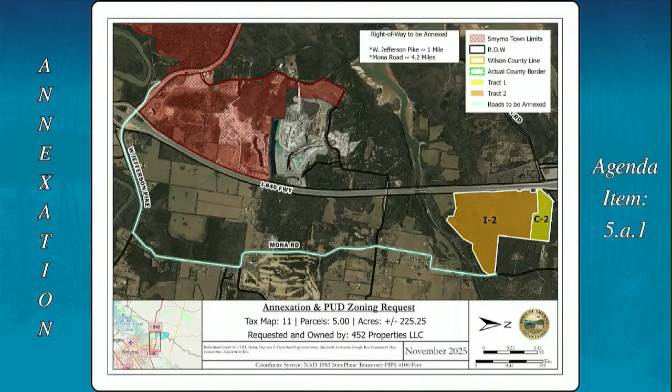Now we're going to get into a couple other comments we had regarding the revised plan. There is a phasing plan within the packet of information you have in front of you. That phasing plan is part of — I'll see if I can pull it up here.

The roadway — this is kind of looking at it west to north, with north on the left-hand side instead of at the top of the page. The roadway that's proposed: there's an existing county road, a remnant of what used to be Mona Road, called Coulter Court. That would be extended through the site.

The phasing plan has the 4 southernmost buildings built in phases 1 and 2, and there would not be a connection back to Bill France Boulevard and Coulter Court until phase 3. We have a concern that, depending on when it got built, as they start building the buildings in phase 3, Mona Road would be the only ingress and egress from those buildings, potentially up through phase 3. So we did have a concern about that from the phasing perspective.

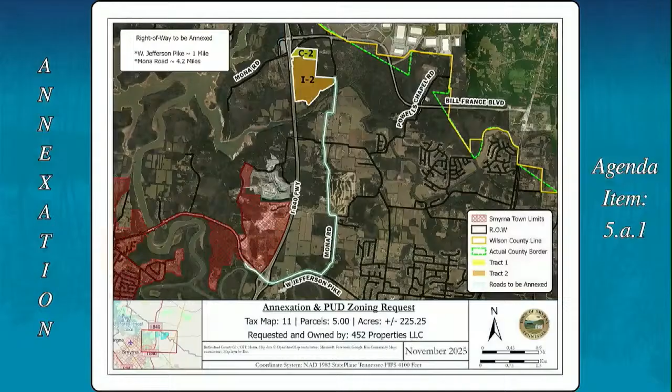So I'm gotta ask - this new road on Mona Road with that big of traffic, is it going to require a stoplight?

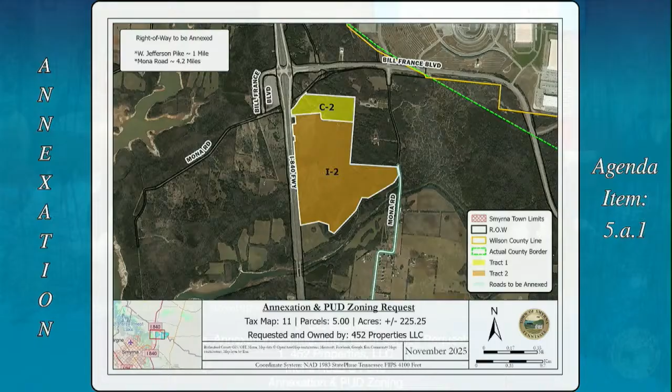Ultimately, at some point, maybe outside of the full build-out of this, when more development continues to the east, yes, at some point there will be a traffic signal at Mona Road, most definitely.

The racetrack, which is across from it, has a lot of industrial development, so it fits the zone. I'm glad they're doing commercial, but there's eventually going to be probably a need for a signal, I would think.

My current thought is just all the homeowners that are south of this - if Paul's met with all of them, and they're all on board and understand what's coming.

Yes, sir. Kevin, would you point out where the potential fire hall would be? Yeah, it's right here. That could have its own driveway in and out onto Mona. Yeah, it would.

So let me, since you got the laser, you can follow me, but I'm kind of looking at your phasing map, and I've kind of heard what you said. Yes, sir, and I appreciate all that, but I'm going to respectfully disagree a little bit.

So Coulter's going to come down off of Bill France, and that first 350,000 square feet of commercial in the front there is Phase 1. Then you immediately pass Building 1 and Building 3, which is part of Phase 3. Then you hit that intersection and go out to Mona Road, which crosses in front of Building 8, which is Phase 1 again.

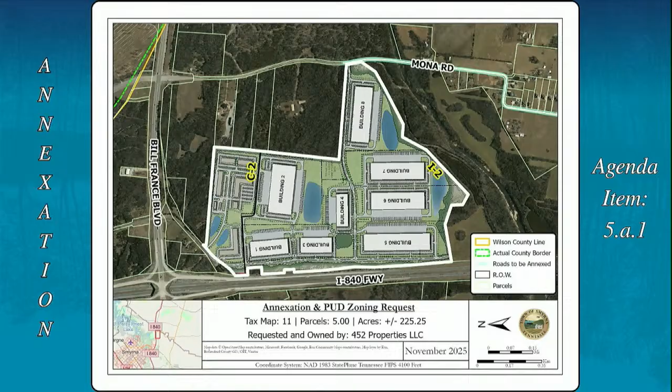So part of the clarification on that - Hillwood has no intention of developing the commercial tract, so they don't control that. If somebody comes in, once they start bringing utilities here and they start marketing this property, and those folks - someone comes in and says, yeah, I want to jump on board Phase 1 when y'all are doing your Phase 1 of the industrial - we just had to put a phase on the commercial because it was asked for.

So with our conditions that we stated in there, if a commercial developer comes in on Phase 1, they have to make that connection to Coulter Court and extend it into the development. So if the commercial starts to develop, that may change, honestly, not to mess up our deal.

The phasing plan is our best guess right now, right? We're locking in the site plan - that's part of the condition too that we came back with.

Originally this was a conceptual layout that had some flexibility, but obviously just talking with the residents and the city council, that was part of the condition. So now we're locking this plan in - any changes that we do to it, we have to come back with an amendment. So that's part of what we've agreed to.

But market conditions could say that buildings 1 and 3 - somebody says I want those instead of building 8 - Hillwood may make that decision, like okay, well if we do that, then those improvements may start happening quicker than what we're forecasting right now. They obviously start with a lot of speculative development.

I understand that, yeah, but it could also be later. Yes sir, that's my concern, right. And here's my problem.

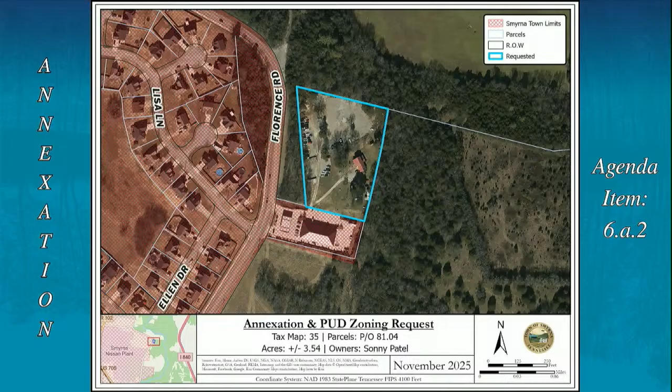How is that accessed, or where would it be accessed from? It would be accessed to the south. There's a development south of here, and that's how it would be accessed. So the access to this would be through it's all the same parcel. It would be accessed through the parking lot of the gas station using the same access points that they have here, and then access to the north.

You said it's all the same parcel, so there wouldn't have to be any kind of easement? Correct. It's all owned by the same people, yeah.

Where specifically is the auto turn concern? Is it more in the storage? It's within, let me see if I can get to that sheet. I know there were some locations where it was crossing, kind of going over some curbs and getting really close to some of the buildings. I don't know exactly which one of those it was, but...

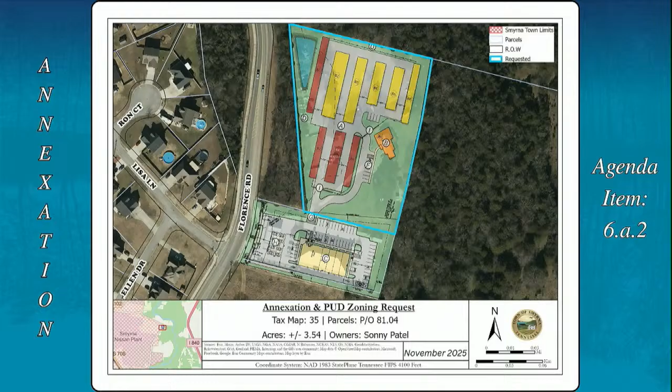So that's what I'm worried about, the property to the southwest, the Hollingshead property. I think it's all RM currently. It seems logical that someday it would develop as residential, right here for sure. And then the Corps property is all between it and Florence, and behind it too, right? That's all Corps, yes.

So we wouldn't need to require a buffer there because it's not technically zoned commercial or residential? I don't know if it has a zoning assigned by the county or not. It's actually not within the town.

Is there any precedence for that land ever developing? It would be up to the Corps of Engineers to sell it. Do they ever? Good luck with that. Have they ever done that? I don't know that we've ever seen that, no. In the 50-plus years it's been in place, a lot of people would like to buy some lakeside property, but they won't ever do it here. Okay.

What is the height of the building? 20 feet, I think, is the maximum, as shown. That would be the maximum height.

So the ones fronting Florence, are they one story or two? It's all single story, yes. I'd say 20 feet's probably the max, some of those canopies would probably be the tallest if they want to get something high enough to park a large motorhome underneath. I've got a fifth wheel parked under one and it's 16 feet. So still less than 20, but it would be right up there.

Well, you're not gonna have too many long vehicles if you've only got a 24-foot wide driveway trying to back or drive into these stalls. That's a little tight. And not to mention, if the fire trucks can't even turn around there, I think this whole thing would need to be adjusted to fit. I think that's our thinking as well. I think the layout of the buildings is gonna have to be adjusted some, maybe a building gets eliminated or a trailer or camper spot gets moved, something like that, potentially.

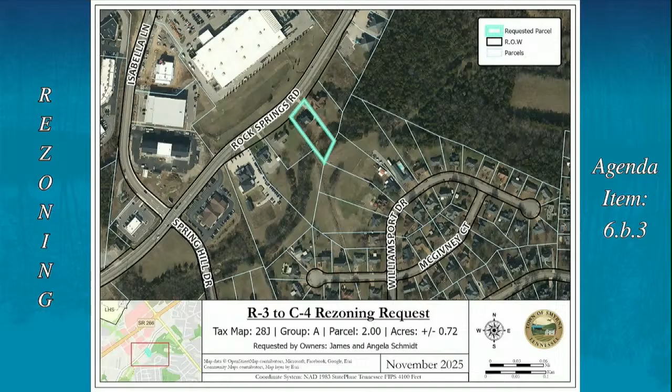Just for information, the rear about 70 feet or so of this property on the eastern boundary, going to about 120 feet on the western boundary, does lie within the floodway, and about 15 feet beyond the floodway lies within the 100-year floodplain. This still leaves about 150 feet in depth on the western boundary and 180 feet on the eastern boundary outside of the flood hazard area. So there's still plenty of room for the existing home, as well as any future commercial building that could be built there. There's adequate area to develop this property commercial, but I wanted to bring that to everyone's attention.

Most of the parcels south of Rock Springs Road through that area have been rezoned, primarily C4. At the intersection with Old Nashville Highway, there's one or maybe two that have a C2 zoning. So this would be consistent with that as well.

Yeah, at the corner of Spring Hill, I believe that's more medical office. That's a medical office building. And next to that, there's a hair salon and some other things as well, I think. And then as you move up, there's an insurance agent's office and a couple other things, and across the street, this is facing the back of Home Depot. Home Depot, correct.

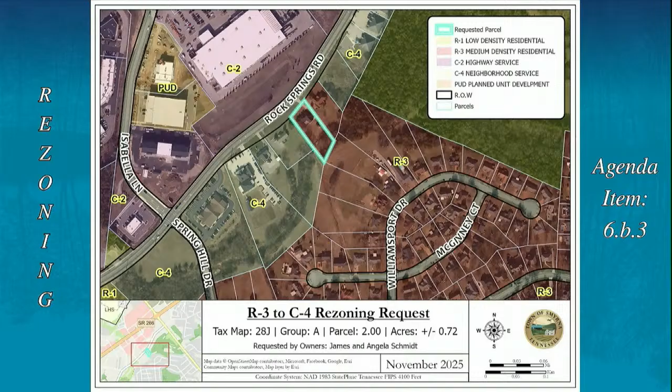Chairman, before you call for any discussion, I'm going to stay out of this. These are good friends of mine. They've asked me to potentially help them do something with that property at a later time, so I just feel like I need to abstain. Okay, so mark him as not participating or voting.

I think these are the last two residential lots along that whole stretch right there. It is. And I've been contacted by representatives from the property to the east, and we're probably going to see that one pretty soon.

Any other questions for Kevin or staff concerning this rezoning request? If not, I'll entertain a motion. I'll make a motion to approve R3 to C4 with staff comments. I have a motion to approve with staff comments, do I have a second? Second. Motion and a second. Any further discussion? All those in favor of approving this motion, please signify by saying aye. Aye. Opposed? This motion is approved.

Okay, we're now on to preliminary plats, beginning with Gambill Oaks subdivision, Gambill Lane at Elway Court, owner/developer Odessa Luis Settles, and Hensley Civil LLC.

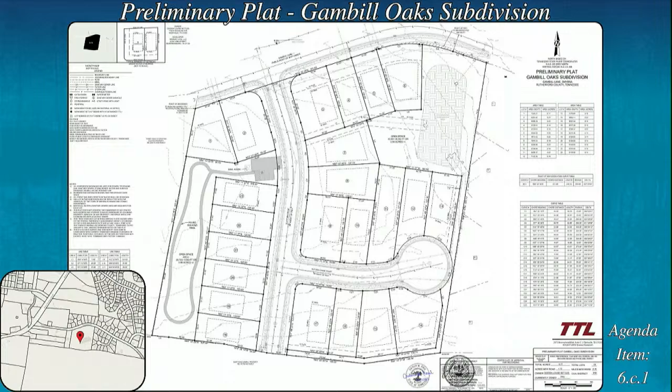Okay, questions for staff concerning this? Is this consistent with our prior approvals? Yes. Other questions?

Do I have a motion? Motion to approve with staff comments from Charles. Do I have a second? Second. Motion and a second. Further discussion? All those in favor of approving this motion, please signify by saying aye. Aye. Opposed? This motion is approved.

We're now on to our second preliminary plat. This is Hidden Hills, Section 7, west termini of Tamlin Avenue, Burgundy Drive, and Bonifay Drive, owner/developer Openland Communities. This is the preliminary plat for Hidden Hills, Section 7. We saw a sketch plat of this a few months ago, so this will be the preliminary plat. It's 59 lots, 23.2 acres, in an R3 zone.

Several standard comments, really 1 through 9, all need to remain. Comments 10 and 11 are related to one another. There are some significant topo changes on this property, resulting in significant roadway cuts and sewer lines proposed to be fairly deep. Those are things we need to work through with the engineer. We want to keep those comments and point them out, as we'll be working with them as they work through the construction plans on this project to make sure they meet all of our requirements.

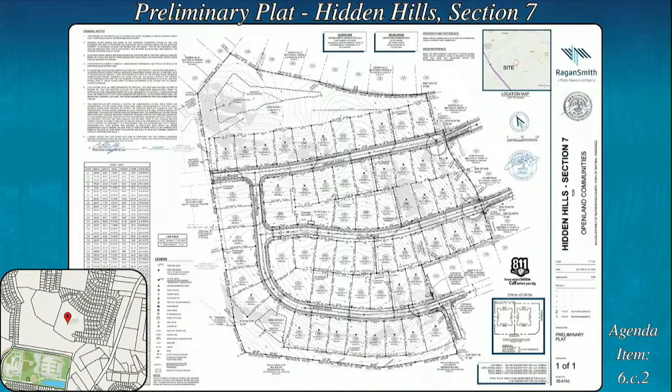Comment number 13 has been addressed. The plat has shown some existing temporary turnarounds, and actually existing right-of-way at the end of Bonifay. It's essentially going away and becoming just a connector road through there. Some of those have been shown as still owned by the previous owner of this property, and that has been cleared up, so comment 13 can be removed.

Comment number 14 is a relatively standard comment regarding the roadway lighting plan. That typically comes in with the construction plan, so we want to be sure we get that as well. So basically, with the removal of comment 13, staff would recommend this to you.

Questions for Kevin on this? Is this consistent with our prior approvals? Yes. Other questions or discussion?

Do I have a motion? Motion to approve with staff comments. I have a motion to approve with staff comments. Do I have a second? Second. Motion and a second. Further discussion? All those in favor of approving this motion, please signify by saying aye. Aye. Opposed? This motion's approved.

We're now on to final plats, first being Briley Downs, Section 1, Phase 1, Rocky Fork, Almaville Road, owner/developer South Coast DFH, Nashville, LLC.

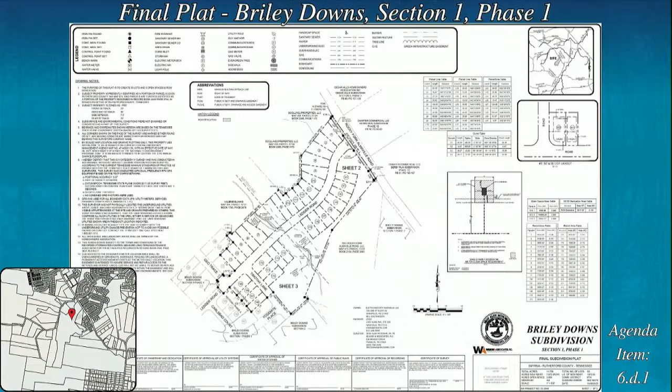Okay, turn to Kevin on this. Do you have any questions? Once again, these were clients of mine some time ago, so for each section of this, 1, 2, and 3, I'm going to abstain from.

Was this previously approved PRD? Yeah, this was a previously approved PRD, and then it did get amended because they incorporated a little bit of the adjoining tract into it. This is consistent with the most recently approved PRD. Under the old PRD requirements? Under the old requirements, that's correct, yes, because it was there, and they were under construction and everything before we ever changed the requirements. They were vested.

Okay, other questions or comments? Move to approve the staff comments. A motion to approve the staff comments from Matt. Do I have a second? Second. Motion and a second. Further discussion? All those in favor of approving this motion, please signify by saying aye. Aye. Opposed? And one abstention.

Next, we have Briley Downs, Section 1, Phase 3, Rocky Fork, Almaville Road, owner/developer South Coast DFH, Nashville, LLC. This phase is 29 lots, 6.48 acres. Again, several standard comments, similar to what the previous one had there, really 1 through 5. Again the same comment regarding the gas line and the drainage easements, and CUD's comment as well. So with those remaining 8 comments, staff would recommend approval.

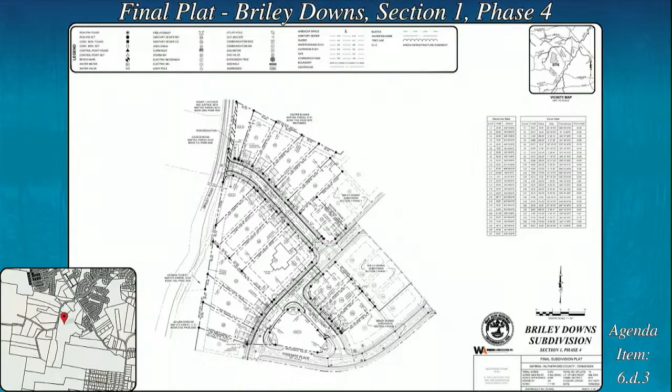We'd ask for a dimension, as this phase does border Briley Road, and so we ask for a dimension for the right-of-way dedication there of at least 25 feet from the center line. And again, the same comment regarding the drainage easements in the plat with CUD, so with those 9 comments, staff would recommend approval. Once again, consistent with the most recently approved PRD, yes, sir, and met all the requirements as far as regulations and ordinances at that time.

Correct. Okay. Do I have a motion? Move to approve with staff comments. Motion to approve with staff comments from Selena. Do I have a second? Motion and a second. Further discussion? All those in favor of approving this motion, please signify by saying aye. Aye. Opposed? This motion is approved.

We're now on to Fox Meadows, Phase 1, Lee Road and Rocky Fork Road, owner, developer, Surrey Homes LLC. This is the Phase 1 final plat. It's 40 lots, 15.05 acres. This is for the Fox Meadows development. The first 5 comments there are all standard comments and would need to remain.

Comment number 6, there were some easements on some of these lots that are kind of oddly shaped or angled. So we just asked for some additional dimensions and labeling on those to be sure, when the home's being built or when a homeowner is looking to build a shed or something, that we have good dimensions on those easements for them. So we can remove the last sentence under that comment. They did correct, I think, lot 37, so we still need 36, 38, 39, 75, and 79 to have dimensions. So just want to keep that comment as amended.

Questions for Kevin concerning this?

Kevin, is there the 2 roads that go out on either side of the mail kiosks? Is there already a development underway on that side? No, there's not. In fact, I think there's actually a future phase maybe of this project as well. Eventually, the property to the west of this property has actually been purchased by the school board for the school. Okay, and this was a previously approved PRD under the old regs? That's correct.

Other questions or comments?

Do I have a motion? Motion to approve the staff comments. Do I have a second? Second. Motion and a second. Further discussion? All those in favor, please signify by saying aye. Aye. Opposed? This motion is approved.

We're now on to site plans, with the first being Bailey Equipment and Intralogistics, Tridon Drive, owner-developer Caravan Ventures, LLC. And Vince, you're up. Yes.

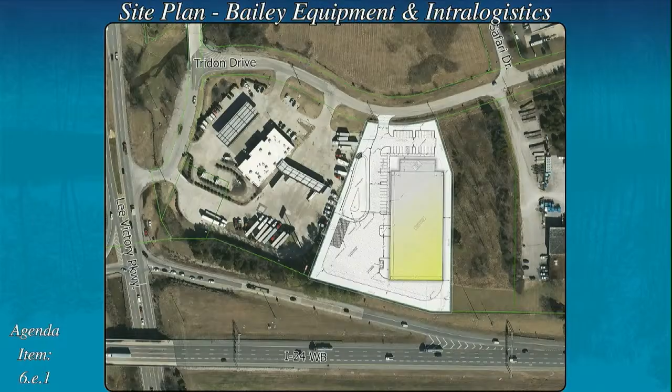Standard comments 1 through 7 all remain, and staff comment 1 regarding the architectural elevations not meeting design review. We do need them to revise those elevations to meet design review. Comment number 2 was a utilities comment asking them to show a 1,500 gallon oil water separator. Comments 3 and 4 are both stormwater comments that will remain, and let stormwater review those at a later date. Comment number 5 is from our fire department.

They did have a requirement that they are to access within 150 feet from all points of the building, as mentioned earlier in one of the other items for the storage units. So really the issue is the south side of the building, which if you're looking at the picture is on the right side. There is no apparatus way to get around that side of the building, and it does exceed the 150 foot from each parking lot area. So fire department does need to reach all points of the building at least 150 foot.

We had another comment within that comment that a fire hydrant is required within 400 feet of all parts of the building. They have done that, so that part of the comment can be removed. And then the last part of it, that a turnaround is required at the back of the building, that is the rear part of the building that is up against I-24. As it's shown, it exceeds 150 foot, which is the length in which the fire department does require a turnaround, whether it be a hammerhead or cul-de-sac. So they do need to show that at the rear of the building. And then, informational part, the last part of that comment, there's a gate to get to the back part of the building. Fire department just requires that to be Knox approved. So that part is more informational, but 4 comments in one more or less. The fire hydrant is the part that can be removed though at this time.

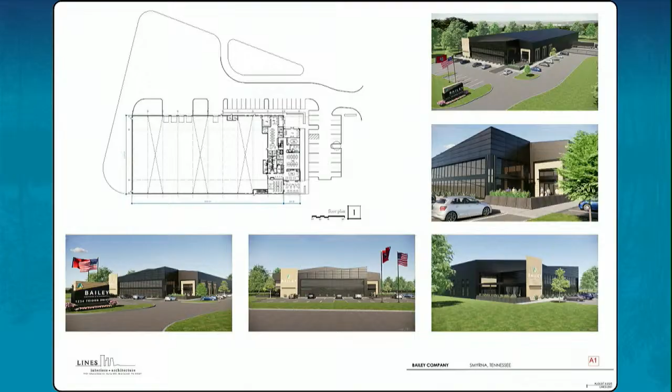There are, of course, cost and functionality concerns. I feel this is an onerous burden of cost that accomplishes nothing for the community, nothing for aesthetics, and nothing for function. I'd rather invest that in making the landscaping even well beyond the requirements I just heard about, bringing in beautiful natural trees and so on, and more importantly, hiring people here in Smyrna. So in short, all comments are addressed except we'll address the landscaping. We're asking that this be approved as is, and I appreciate your support and your service to the community.

Thank you. Okay. Oh, I'm sorry, you weren't speaking. You were just... I'm here to answer questions if you have any. All right, any questions from the commission concerning the applicant here?

In the comments of the metal, I don't think this is what we've seen typically, just basic industrial type metal. These are the new, I assume they're Kynar, as far as the coatings on here? Something like that, yes. The front part of the building would be a more upgraded architectural metal panel, so it is quite a bit nicer than your standard industrial metal siding. So you're seeing this type of metal on a lot more commercial buildings that are going for that more modern, higher end look? But it's still metal. It's still metal, yeah.

Is it metal where the Bailey sign is at? What we had planned for that was, it would probably be a metal, but it looks like wood.

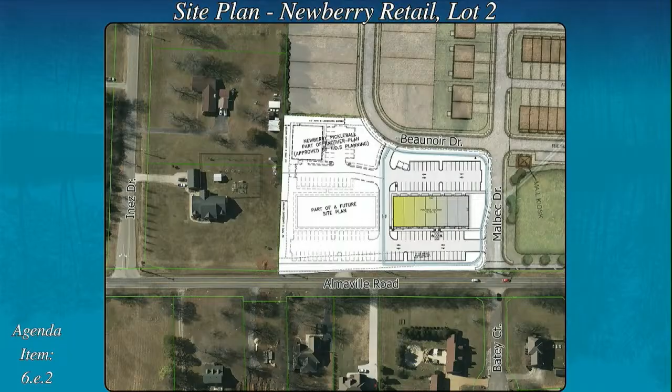Questions for Mitch on this? I just got a question for Jeff.

Based on the amount of certain types of businesses that we can watch go into most of these retail spaces, do we have any control over removing any of those as potential tenants?

Not sure. Vape shops? This particular PCD or PUD had C4 uses, so they couldn't go in this one. Per the PUD, we'll put that in your pipe and smoke it for later, because it's going to continue to come up. As we have it right now, we couldn't remove one.

If we put something in place, I'd have to see what that is. I don't agree with what I've seen some jurisdictions do so far that would hold up to a challenge, but we'll look at that. I know you need more work to do. You sit back there twiddling your thumbs. That's right, I'll ponder on this issue tonight, probably. Send an email forthcoming.

So, obviously, there are 2 roads that provide access to this, part of the LF development. So there's no direct access to Almaville Road from this property, that's right? That's correct.

Could you pronounce that road to the north? I was waiting for somebody to say Beau Noir? Beau Noir, maybe? I would guess Beau Noir. Depends if it's southern or not.

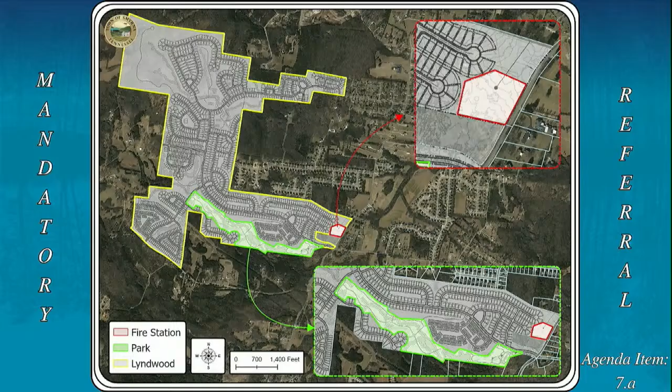The beauty of it is by donating the land, we can do what we need to do with it in the future - don't have to figure that out right now. My concern was just whether it's actually usable land, not just a hillside. They told us Cedarstone wasn't usable too, remember? We had to make it usable with some of it. It wasn't usable either. And in the big picture, this is where we would want a fire station, I presume?

Yeah, this is certainly an area we need to think about. That's something we've been thinking about, trying to find a place, so this works out well for us in that regard. We've been talking about our urban growth boundary goes just a little bit past 840, right? Yes, so we've talked about needing another fire station out there. There was even a conversation from the county about putting more schools out there in the future, so we definitely want one close to the schools - this fits that for sure.

I'm going to need a motion on this. Motion to approve with staff comments. Do I have a second? Second. Motion and a second. Further discussion? All in favor of approving this motion, please signify by saying aye. Aye. Opposed? This motion is approved.

We are now on to the November bond review report. Yeah, it's still a long one, so I'll try to go quickly. You gotta quit having long ones, Kevin. I know, I keep hoping - we are recommending release of at least one tonight, so that's good.

At least one, Cedar Hills Section 4, Phase 2 - I did reach out to the developer on this one, and he typically gets back to me pretty quickly, and he did this time, so I don't need to follow up with him. They do still need to pave this, and we've got most of the homes either built or permitted, so they need to get that done. They recommend a 6-month extension on that one, so hopefully they can get it done next spring. We have heard from at least one owner in that area concerned about that as well, so I'll reach out to him again.